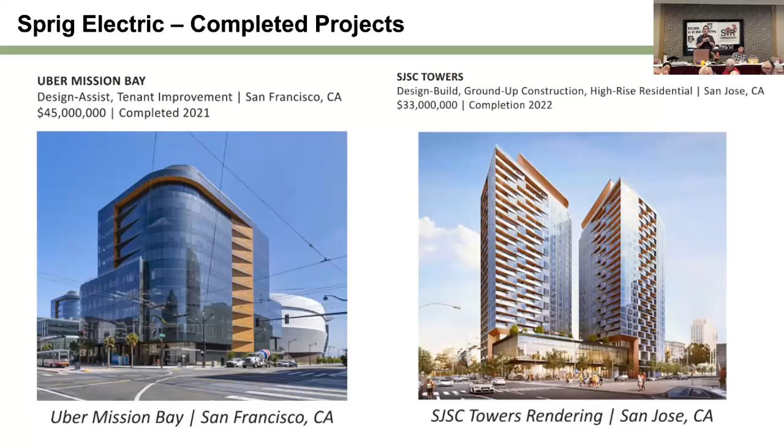If you go to the next slide, this hasn't come out, but essentially this is what that bridge is going to look like. We're doing some design work and compliance work with it right now, but it's really going to be cool. It's going to have these trees that go along the top, and if you can tell, those trees completely light up, all the different colors of the rainbow.

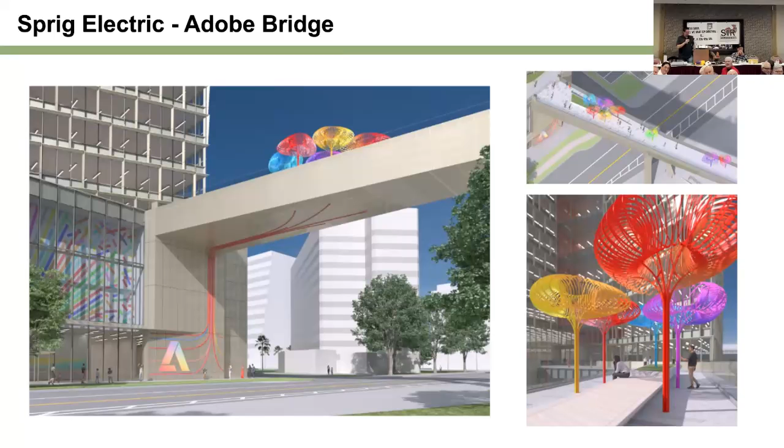And then beneath, they have digital roots that connect to the bottom of each tree, and those roots, as we call them, will head down to the big Adobe sign on the bottom. That stays lit day and night, kind of like a little art piece they'll have there. So it'll be really nice looking when that's all done. I don't think many people have seen that — you guys have seen it in the design team, and that's about it. So there you go, a little sneak peek of what the bridge is going to look like.

All right, next slide, please.

All right, so Title 24, Part 6, or Title 24 — what is it, right? A lot of people probably ask, Title 24, what is this? Well, Title 24 is actually all of your different building standards for California. We've got everything from administrative standards to electrical, mechanical, plumbing. The ones in red that you see, California Energy Code and Part 11, the Cal Green standards, that's what myself and my group deal with — everything energy efficiency. It's nice, it's required, but it's not going to kill anybody if I mess it up, so I have a little leeway with that. Go ahead, next slide, please.

All right, so why is Title 24 important? Well, it's actually a state law. All other building codes, for the most part, are adopted by the different municipalities. Title 24 is a state law that goes across all the municipalities. Now, it can still be overrun by anything life safety — life safety inspectors will always be able to override any of this, but it is required and we can't get out of it. In 2013, when this started, I got a lot of pushback from lighting designers, from architects, from my own project managers and whatnot. Nobody wanted to adhere to this, but it was very apparent early on that this is here to stay and it's not going anywhere.

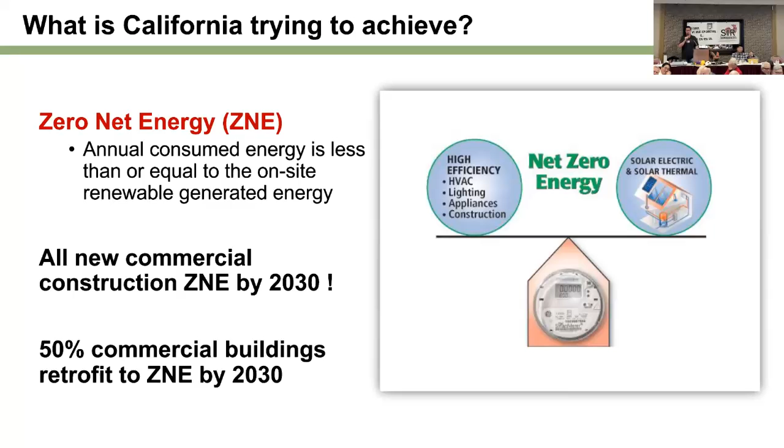Next slide, please. So what are we trying to achieve here in California? Essentially, California is trying to achieve zero net energy for commercial buildings, and their goal for zero net energy commercial buildings is 2030. So any energy used on that commercial building has to be produced in that building or by that building by 2030. Now, I don't know if they're going to meet that, but every 3 years they're ramping up the standards in quite large ways to try to get to that point. They also show 50% of commercial building retrofits are going to have to be net zero energy by 2030. So there's going to be a lot of new technology thrown into these things to get us to that point. Next slide.

All right, what projects are regulated? Well, typically new construction, additions, and alterations — these are all going to be covered under Title 24, Part 6 regulations. Retrofits or alterations are hit and miss depending on what they are.

Go ahead, next slide. I'm just giving you a little quick overview of Title 24, and then we'll dig in. Building types that are regulated - all building types are regulated in Title 24. As you can see, assembly, business, mercantile, you name it.

Prisons are exempt, so if anybody wants to start building prisons, you don't have to worry about energy efficiency standards. And healthcare facilities are limited. We do have to comply from a watts-allowed standpoint, but controls are not required in healthcare facilities.

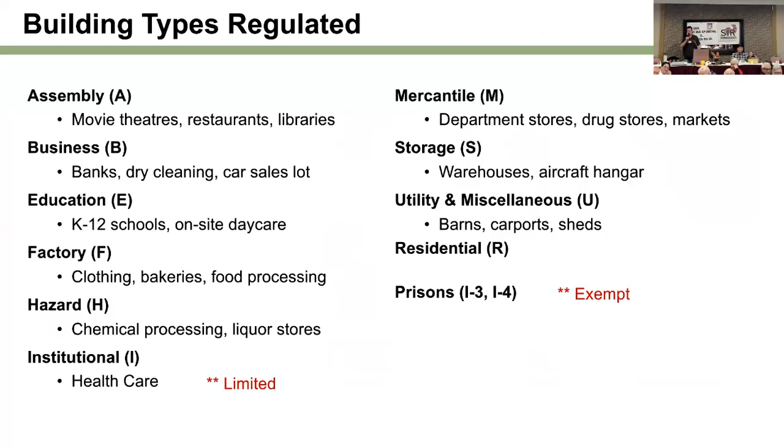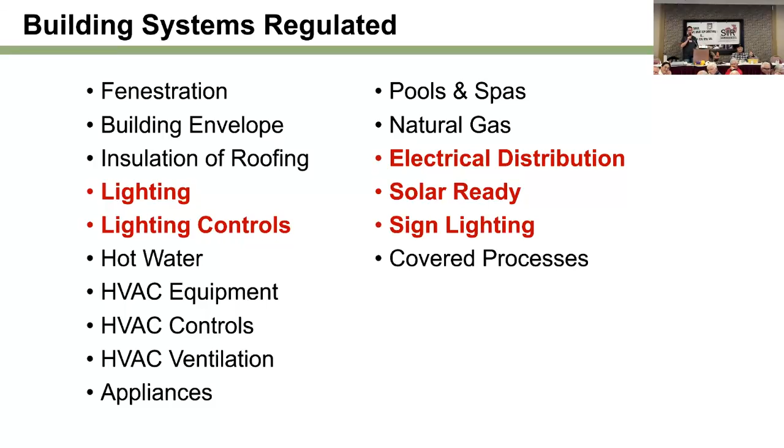Although typically they're going to be spec'd out anyway. Next slide. All right, what systems are regulated? Well, Title 24 regulates all these systems of the building - anything from fenestration, which is like your outer coverings of the building envelope, covered process, pools, spas, natural gas. You can see the ones in red - lighting controls, electrical distribution, solar ready, and sign lighting are all covered.

Under Title 24, Part 6, and that is what me and my group have to deal with. Next slide, please. Last one with a little overview is what is regulated - what lighting controls are regulated? All lighting controls are regulated.

We have what's called Title 20 in California, and essentially all appliances, whether it be your fridge, your washer, or your light switch, or your fixture, have to be regulated through that, and they have certain standards. Most of them are energy efficiency standards that they have to meet to be listed. If they're not listed, they're not allowed to be installed. And as an acceptance technician, that's one of the things that we verify when we're signing off jobs, is that we have listed equipment in these buildings.

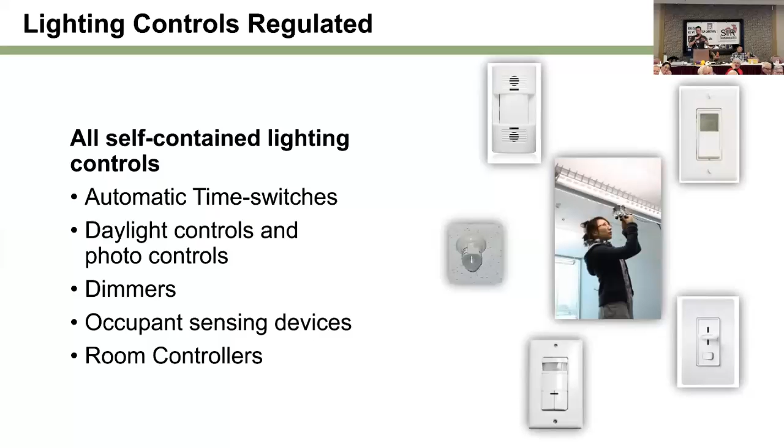All right, next slide. So Title 24 has a lot of documentation, right? It's the state of California. So essentially you're dealing with the state of California, you're dealing with a lot of regulations, and regulations equals paperwork.

So we have documentation that basically goes through the whole process. I have what are called certificates of compliance - NR is non-residential. So we essentially have non-residential certificates of compliance that basically map out the job. So we have to do a takeoff on the job, make sure it complies from an allowed wattage standpoint, and make sure that the controls are going to comply with the allowed controls. Then it goes on the drawings, that goes to building permit.

Coming out of building permit, we have to fill out what are called NRCIs - these are construction installation documents. These would be filled out by the foreman or the project manager. And once the project is ready for occupancy, we go for electrical final, and before electrical final, that's your life safety with the inspector.

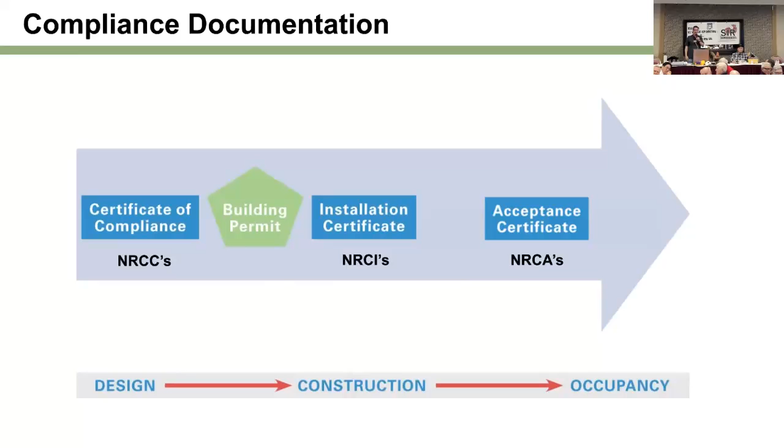We have to have what's called an acceptance test, and the acceptance technician will go in and he'll verify again that all the energy efficiency measures and controls are working and installed properly. That is how you're going to gain occupancy now for a construction project in California. All right, next slide, please.

So this is some of the paperwork that you'll see, okay? This is 4 pages out of our electrical drawing, and this represents a 207,000 square foot tenant improvement. So all of that documentation you see there produced for this one tenant improvement job. What you can see, this job contains indoor and outdoor lighting. On this job, it required indoor documentation, outdoor documentation, and electrical power distribution documentation. So quite a bit goes on there.

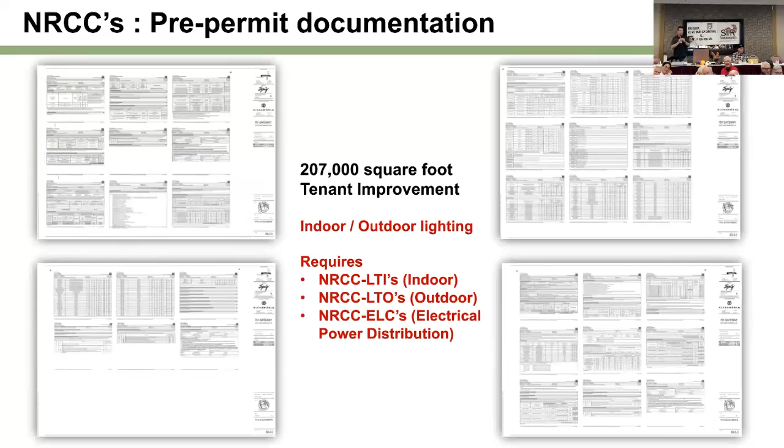Let's take a look closer at what some of that documentation has. You'll see the one on the left has a lot of your summary statements, so it's going to let the inspector know that the job complies, that the allowed wattage is allowed. But you see the one on the right is essentially all the different spaces of the building. We have to list all the spaces of those buildings if we're doing a space takeoff. Each of those spaces is allowed a certain amount of wattage, so those numbers come from the state. We have to punch in the amount of square footage. All of that computes out an amount of wattage that can be installed in the building, and then we have to make sure that we stick to that.

So, you know, we did that Adobe Tower downtown, the 18-story Adobe Tower. I think there's about 9 or 10 pages of documentation, just pre-permit documentation, not the construction installation permit documentation, and not all the acceptance testing documentation we have to do at the end. So I tell you, teach your kids to type or something. They'll have a career in this thing.

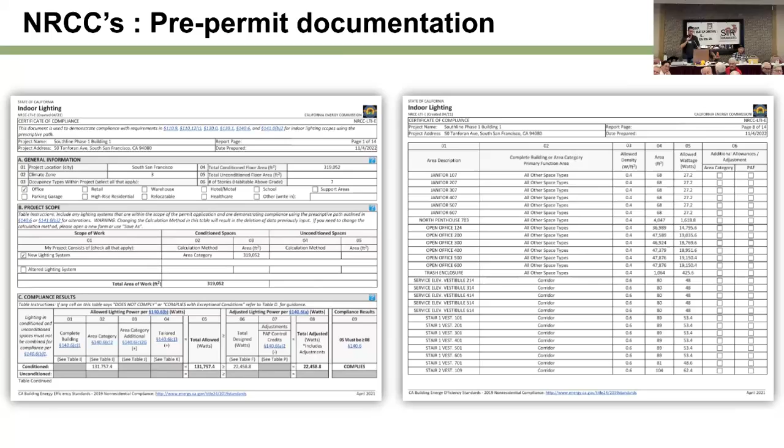This really kicked into gear in about 2013, okay. That's when the acceptance technicians came on board, and when all the really high standards of trying to get this where they want it to be came in. Now, I don't list 2013 -- 13 and 16 were very similar numbers, because at that time the LED fixtures were just kind of coming up and really getting going.

LED fixtures are what's letting us lower these wattage allotments because they're so efficient. Compared to what we used to use, the 4-foot fluorescent tubes, typically a 2x4 with 4 lamps in it -- if you got a 32 watt tube, 4 of them, you're talking about 120 some odd watts for each 2x4. Now our 2x4s are usually around 29 or 39 watts, and we get out the same amount of light.

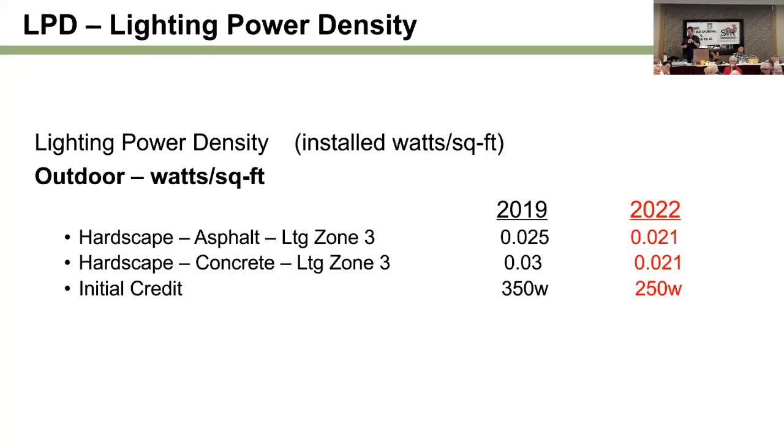Watt Stopper -- I don't know if anybody's heard of Watt Stopper. Watt Stopper is probably the number one control system out there right now. Legrand is who owns them. I do a little stock, and if you're interested in that, that's a company I would probably look at.

And the only reason I say that is I'm going to talk about some of the changes in the 2022 code for room controllers and the relays that we use to control here, and they're pretty much going to quadruple starting in the next code cycle.

I don't know who to buy in stock, but anybody that sells these electrical controllers, you probably want to have something in them. They're going to have a lot more work, especially if we don't go into a recession.

So Watt Stopper is a big one. Acuity nLight is another popular brand. Enlighted is a very popular brand. That one's used almost exclusively at Apple and Google. That was actually a Stanford product, Stanford engineers who came up with that. It's a fully wireless system, very intelligent system. That system, they use it in hospitals to track nursing stations.

It can do a lot of things, like track temperature and then map it all out to where your hot spots are, where your cool spots are, so that you can adjust your HVAC controls and stuff like that.

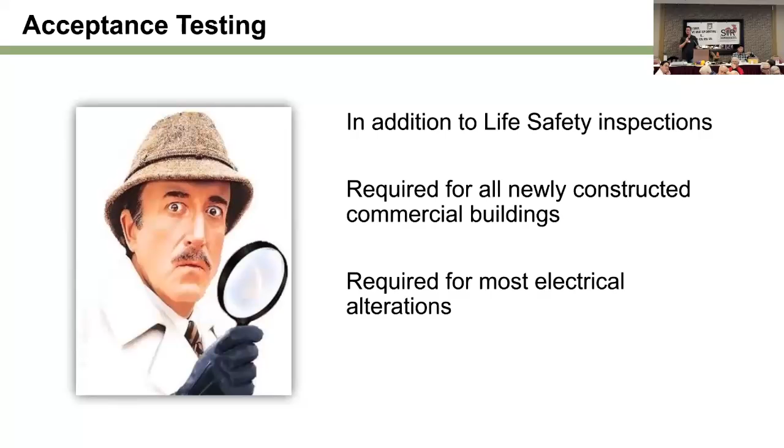Every 20 to 30 jobs, we get a paper audit. Essentially, they look through my drawings, they look through the documentation, they make sure it matches up, and they ask for $200, and we give them $200.

Every 100 jobs, we have to do a physical audit. So for a physical audit, I'll meet Mark or Leslie out there on the site, and they'll go through and make sure the documentation's correct. They'll make sure the occupancy sensors work and the switches work, and they'll charge us $500.

So go figure, it's quite a little racket they got there. But hey, it is what it is. It's a state, and it's the price of doing business here. So it is what it is. That kind of wraps up the CalCTP.

So we finished the process of Title 24 with training, system training.

Required for all systems, and these systems are programmable systems that are capable of doing a lot of things. They're networked, most of them, so that you can program from a single source. You can retrieve data through that single source. So there's a lot you can do with these systems.

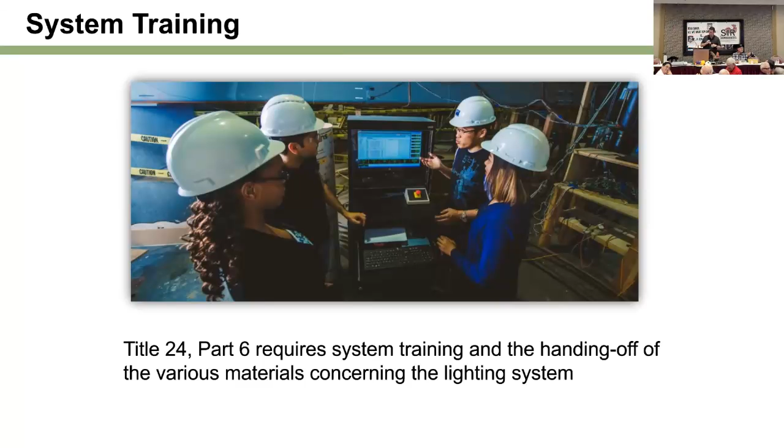With the big systems, we do have system training. Typically, we'll use the vendors to do this, as they can work them through the actual connections of the system into their internet and all that kind of good stuff. That is not my line, and what I do, I stick to the code, so I don't even want to go down that way.

So essentially what we've talked about right here so far is just a little bit of an overview of Title 24, right? There's a lot to this thing, but essentially it's energy efficiency codes. We know there's a ton of paperwork. We know there's acceptance testing that has to get done. It's essentially really created a new world for the electrical world, right?

Before 2013, you had to have occ sensors installed. That was it, and if they worked, it didn't really matter. Hopefully they work, but if they don't, nobody's testing those things, they just move on. Now everything's tested.

So what I want to do now is walk you through some of the controls we're doing on these buildings, and I think some of this is going to blow your mind a little bit. Has anybody here worked in the construction field on electrical, or are you familiar with A/B switching and some of the old stuff we used to do?

Essentially back in the day, you'd have to have a light switch. Most likely, if it was after maybe 1990, you'd have an occupancy sensor. From that point on, maybe the mid-90s, they added A/B switching. So along the windows, they might make you switch those lights with a different switch, so if the customer said, hey, I got plenty of light coming through the windows, I can manually turn that row of lights off and save a little energy. That was about as far as it went.

So what we're going to talk about now is where the state currently is, and I included some of the 2022 requirements that start January 1st, 2023. If you get a little confused, the code's kind of behind - the 2022 code starts January 2023. We're currently in the 2019 code, and it's updated every 3 years.

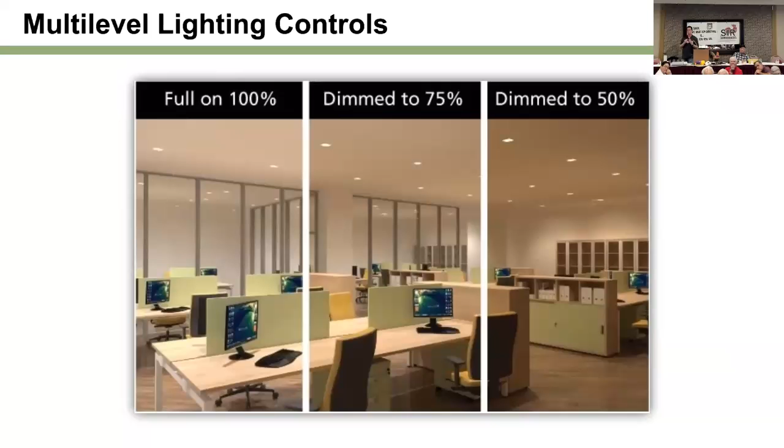And that's typically just a little bit of math. Is your space over 100 square feet? And does the space have over half a watt of light per square foot of general lighting? If so, it's getting a dimmer switch. So most conference rooms now, most break rooms, most offices, all these places and lounges are going to have dimmer switches in them, so the customer has the ability to dim the lights if they want to save some electricity.

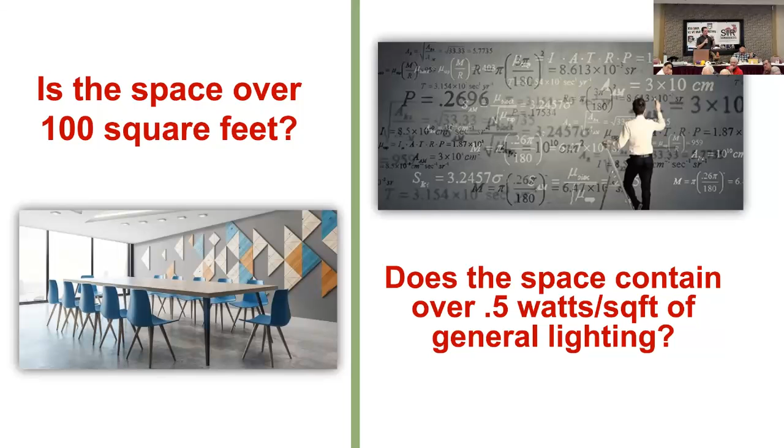Now, if any of you are familiar with the old rheostat style dimmers, they basically bled that energy off in heat, so you didn't really save energy. Well, Title 24 requires that dimming units save the energy that they reduce in light output. So if this dimmer switch reduces light output by 50%, it reduces light power by 50% also. That's a big change to the code, and what's allowing these dimmer switches to actually save us energy.

All right, so let's take a look at this. Go back one slide. We just talked about manual switches, then we talked about the dimming requirements. The next one we have, and they get a little more extreme as we go, so they'll get a little more fun as we go.

We have auto shut-off requirements. All installed indoor lighting must have controls that automatically shut off all the lighting. Now, we already said they all have to have a manual switch - they also have to have automatic means of shut-off. We can do this two ways: occupancy sensing controls or time clock controls.

Now, time clocks are limited - you can't use them in every space. Certain spaces have to use occupancy sensors. Again, there are exceptions for electric rooms and for night lights. Night lights, typically, are along paths of egress, stairwells, corridors, things like this - these are things that essentially can stay on.

The other one is electric rooms, and electric rooms becomes a life safety issue. It automatically shuts off on an electrician when he's maybe in a hot panel swapping out a breaker, and then boom, all the lights shut off on him, and he's kicking his back leg trying to get the motion sensor to kick back on - not what you want to be doing. Not that we should be working hot, but anyone who works in this field knows that as an electrician we do hot work sometimes, so it is what it is.

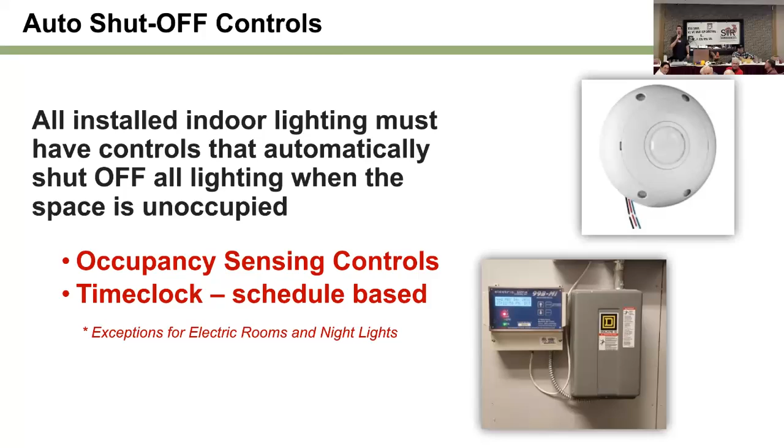Next slide please. What I wanted to do was walk you guys through the different types of occupancy sensors. These are now required for certain types of installations, certain types of spaces. We have 4 different types of occupancy sensor settings.

The first one is just your standard occupancy sensor. This is where you leave the room, when you vacate the room all the lights turn off. When you enter the room, all the lights turn on. Pretty simple, pretty standard. Next slide please.

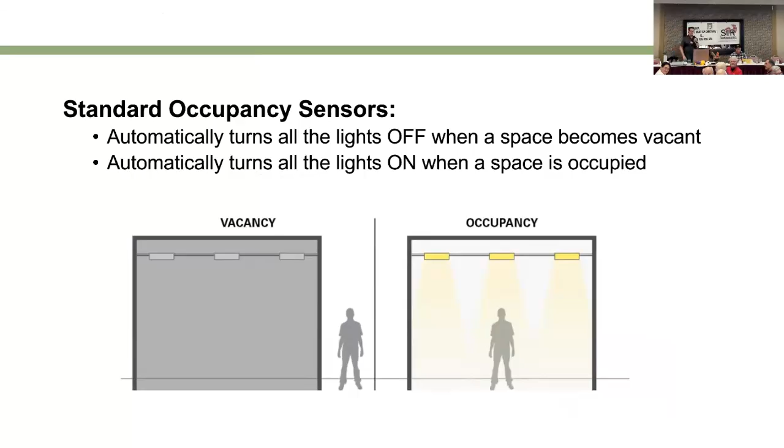We have another type - this is called our partial-on occupancy sensors. Again, each one of these is required in different situations. We won't go into all that because, again, I do hour classes every 2 weeks, and they last for like 6 months. I can keep you guys busy for a long time if you want, but probably bore you.

Partial-on automatically turns lighting off when you leave or vacate the space. Now, when you enter the space, only part of the lights are going to come on, okay? We're doing this typically in conference rooms, offices, things like that now. To get all the lights on, you're going to have to manually turn them on. So you walk in the room, one of the 5 lights turns on, you go over and manually turn the rest on if you want. Again, they're hoping that maybe you went in and just forgot some paper.

You went in, grabbed the paper off your desk, and you leave - and guess what? You never turned all 5 lights on. This is kind of how the state's looking at this. They're looking at any way they can collectively save energy, and it all starts to add up.

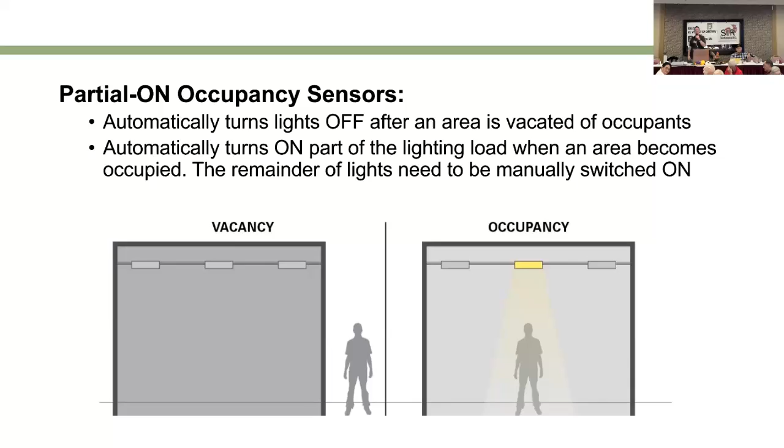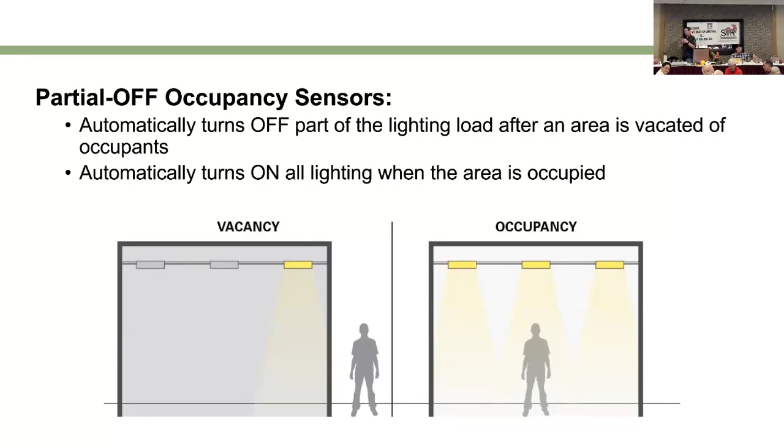Next one we have is what we call a partial off. Partial ons are like conference rooms, and these partial offs are going to be in stairwells and corridors. So when you leave a stairwell or corridor during typically occupied working hours, it's not going to go all the way dark - it'll leave some light on for you. When you enter the space, all the light's going to go on. When you leave 20 minutes later, because that's the code - 20-minute timeouts - we're only going to go partial off.

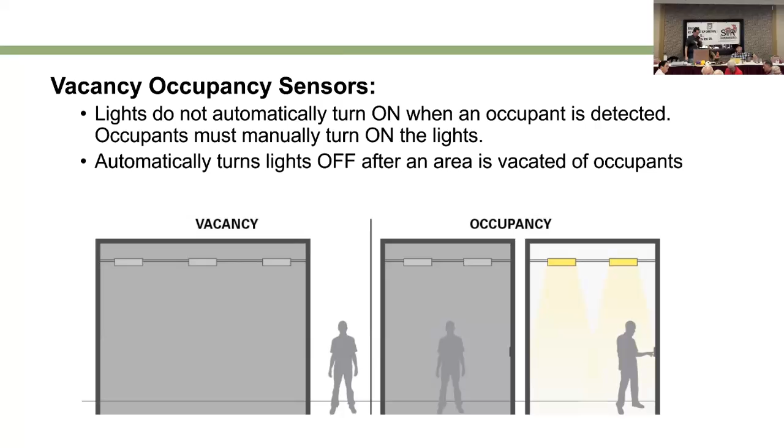This one creates always a lot of confusion - vacancy sensors. Everyone's like, well, what's a vacancy sensor? A vacancy sensor essentially acts the same as all the other sensors when you leave - you leave the space, all the lights turn off. But the thing about a vacancy sensor is when you enter the space, the sensor picks you up and does not turn any of the lights on. Those are meant to be turned on completely manually. The code allows us to do either partial on or vacancy sensors for certain applications, but we never do vacancy sensors because all we get back from customers is 'my occupancy sensor doesn't work, nothing ever turns on.' At least with partial on, they understand it picked them up and only turned part of the lights on. If it doesn't turn any lights on, customers just get angry and tell you your system doesn't work.

What the state has done is essentially said that open offices or offices over 250 square feet now have to be controlled with occupancy sensors in control zones no larger than 600 square feet. So at 600 square feet, all the fixtures that sit in that zone have to have their own occupancy sensor that only controls those lights. We used to be able to go up to 5,000 square feet - we could do a huge open office like at Adobe, and essentially that entire 5,000 square foot open office would be on one relay, so all the lights would come on and off together when you walked in the room.

When you go to that same 5,000 square foot open office now, you're probably going to have about 10 relays, and each one of those zones will come on individually as you walk from space to space.

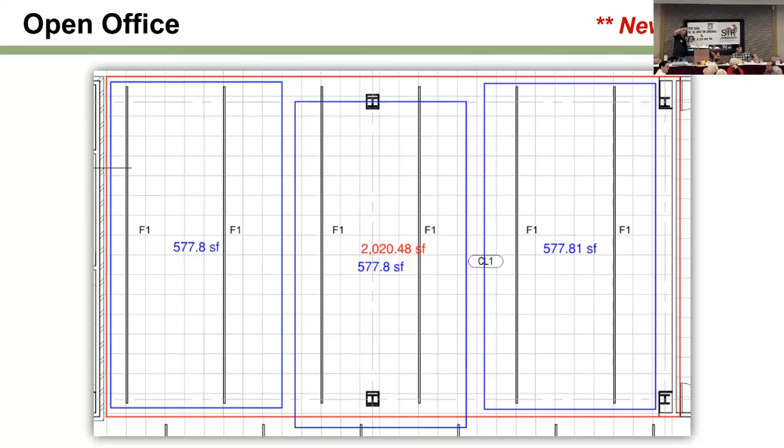Let's look at the next slide, and I'll show you what this looks like in plan view, or in the electrical drawings. So as you can see, I've got a Z1 fixture and an F1 fixture. The two fixtures on the left are circuit 6, and the switching zone is A - so all of those fixtures can manually switch with switching zone A. You'll see my light switch A is up at the top right corner.

But from an auto shutoff perspective, I cannot have all those fixtures turn on and off together with occupancy - they have to be broken up. So the two left fixtures are 6A, which is your switching zone, and then there's zone 1, Z1, which is my occupancy zone - signified with the two occupancy sensors in that group called Z1. Right next to it you've got Z2, and over next to that you've got Z3.

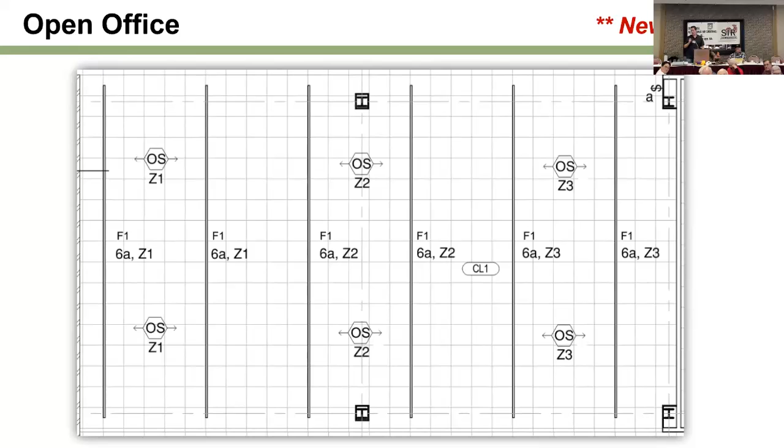So yeah, quite complicated. Real quick, go ahead, next slide, and I'll show you what this looks like as this walks through.

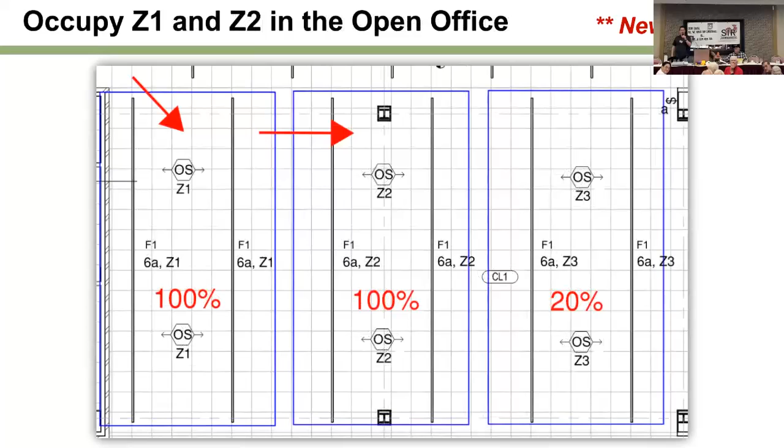Next slide, please. I walk into the next zone. That zone goes to 100. Again, the other zones stay at 20. Next slide, please. And as I exit, everything turns off.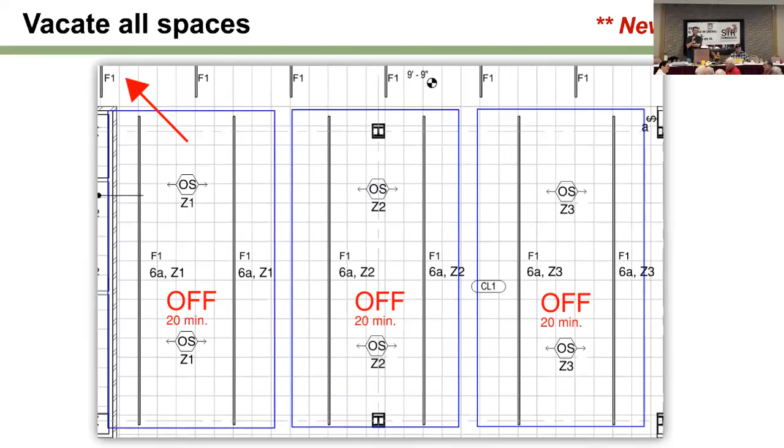So that's essentially what we're having to do. Like I said, the Adobe project is roughly, I want to say, 40 to 80 room controllers per floor. This would have made the Adobe project probably around 200 to 240 room controllers per floor. But whoever wrote that code, they had something to do with the vendors.

Next slide, please. All right, let's take a look real quick at daylighting requirements. So, we got a question? Yes, sir.

Great question. So currently, typically if they're set up right, no, they shouldn't, because we install typically dual sensors. You have PIR sensors, which are looking for major movement. Then you have ultrasonic, which can pick up a little better. They have microphonic if you're talking about it. Now, to your question, if it's set up properly and spaced properly, yes, you should always have - even typing should be able to keep the lights on.

Ultrasonic sensors, you can't really keep them in a zone. They just kind of wander. They'll go around corners, do things like that. When we have to keep these zones stuck at a 600 square foot zone, we're going to have to put probably PIR-only sensors, and tune them down so they're not extending out 35, 40 feet and picking up people in the next zone. So yeah, I wouldn't be surprised if you have a couple hand waves at your computer going forward to get your lights to come back on. Now, hopefully you have multiple people in your zone and somebody's moving, but it does come up. It's a great question.

One more question, okay? You're talking LEED standards, LEED? Right, LEED, yeah, okay, so LEED.

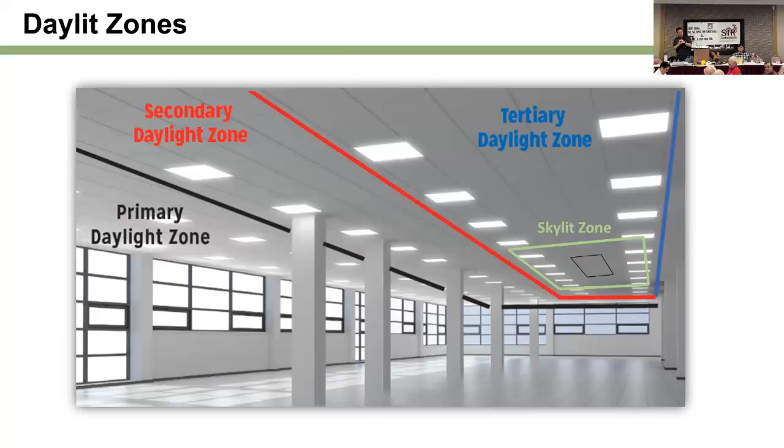This is all automatic now, no longer manual. Before we had A/B switching along the windows, and that was manual. This is automatic—the customer has no choice. It's going to be dimming whether they like it or not.

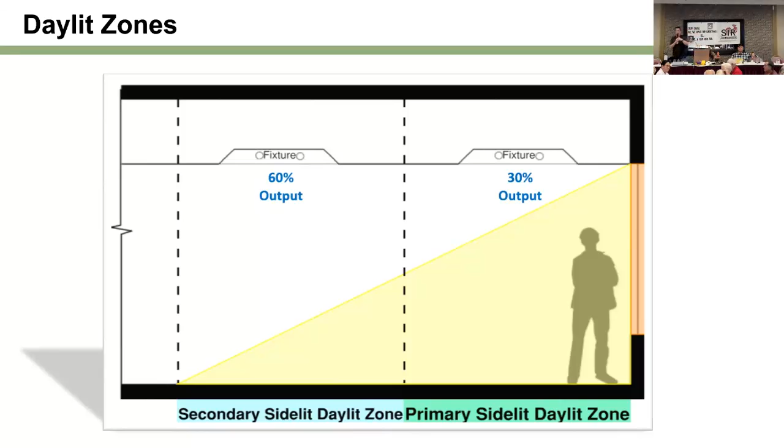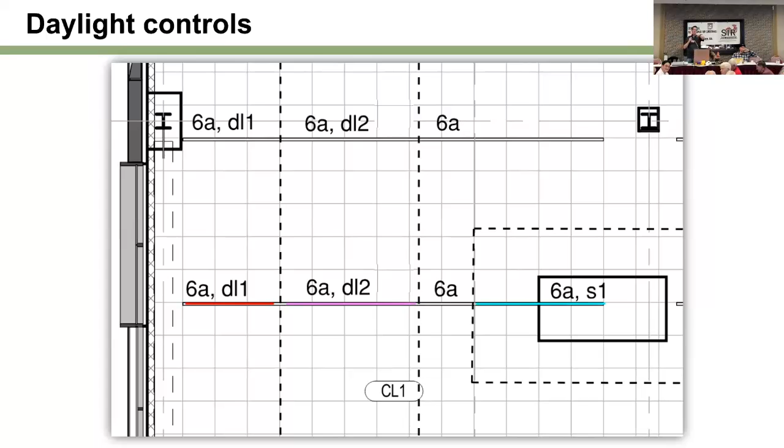So we have two sets of dimming cables that go to each one of those sections. And then that all has to be programmed, because here's the thing: when you manually dim your fixtures, all those dim together. But when the daylight sensor comes into play, it has to individually dim the section.

Oh, you could have that, and then you have lighting designers, of course, that come in, and the lighting designer looks at his linear fixture, and it's 30% here, 60% there, and they're mad as heck because they're like, that's not the look I'm going for. And it's like, well, that's the look California is going to give you.

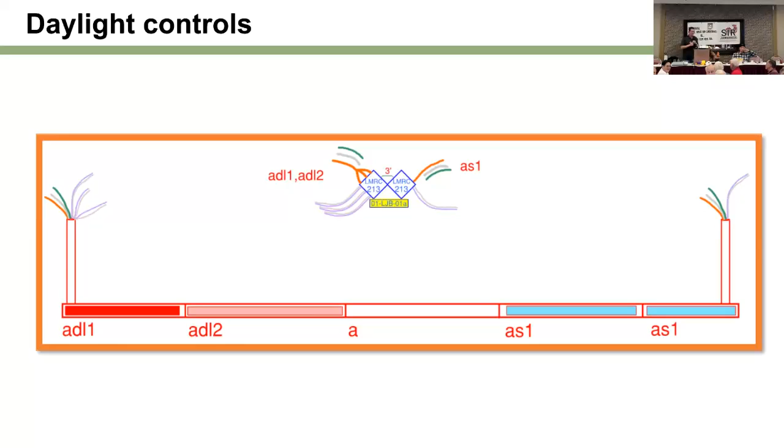So anyway, that's our daylighting controls. We've got a couple more, and then we'll be done. Automated demand response, again—this is load shedding that we have to do for all buildings.

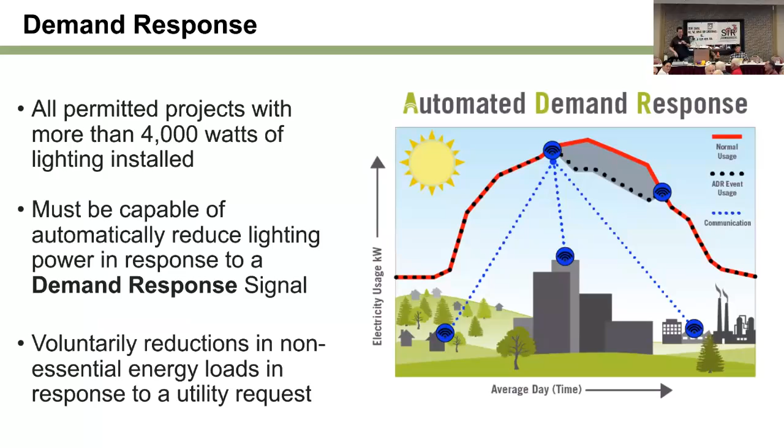And that applies to big offices. Now you can opt in and out of those, and you do get money if you do.

Controlled receptacle—you guys ever heard of controlled receptacles? Well, there you go. Now your receptacle doesn't stay hot all the time. When you leave the office, they shut down. When it's the weekend, the receptacles shut down. Now, not all of them for every office, but half of them. And so, of course, what do the customers all do? They put tape over the controlled receptacle and say, don't plug anything into that one, because that thing keeps shutting off all the time. But it is required, and this is not going anywhere.

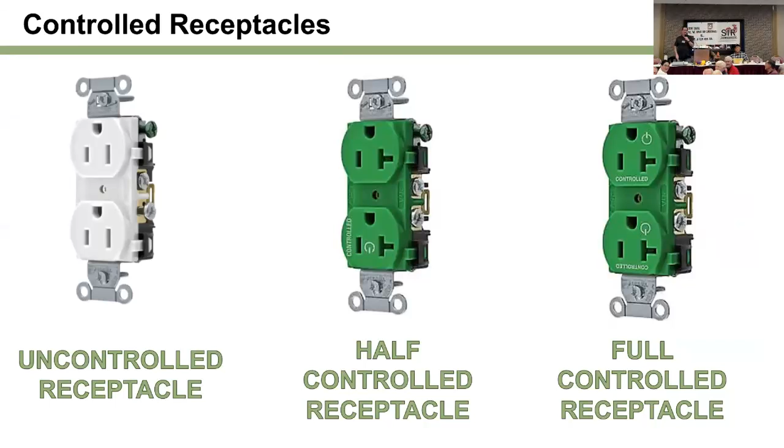That's a great question. Installed upside down—it's not a code requirement. It is a safety thing that some people have felt is safer, so you can't lose something, but it's not a code requirement. Well, that way your ground's on top, so if anything fell, it would hit the ground, and it wouldn't go across the two phases, or wouldn't go across the hot and neutral. But it's not a requirement.

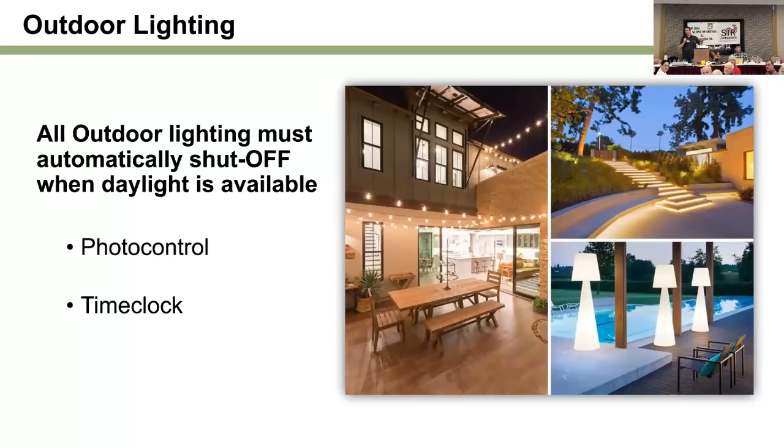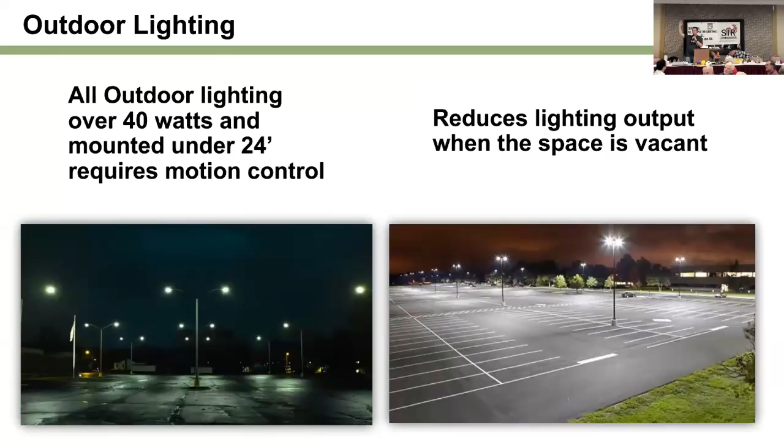So what if you set up your office, your building, and then ten years later somebody builds a 20-story building next to you? That's fine—that will change the sunlight, but your sensors adjust to the sunlight. So if you block the sunlight, then the sensor will never trigger anything. And I believe that's it. That's it, folks. All right.